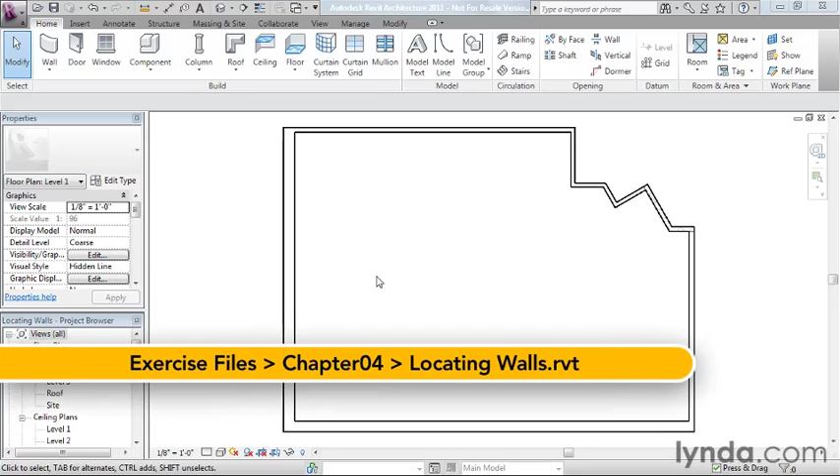So to get started, I have a really simple file here on screen called Locating Walls. There's also a PDF illustration in the folder that shows the completed floor plan layout that you can use as a reference for working as we're going along.

Let's start with the Wall tool on the Home tab. Now this time we want to actually choose a more specific type of wall. So for the interior partitions of this space, we're going to use a wall type called Interior 4 7/8 inch partition. We're choosing that off the Properties palette from the drop down at the top, referred to as the type selector. So just for future reference, when I refer to the type selector, that's what I'm talking about. We're going to go ahead and click Interior 4 7/8 inch partition.

We're going to leave the location line set to wall center line, and the base constraint is of course level 1 because we're working on that level. In this case, we want to make sure that the top constraint is going up to level 2, so we just want it to be a 1-story tall wall.

And then we're going to come over here in the file, and we're going to keep this fairly simple. If you move your mouse around on screen, it'll pre-highlight existing walls, and in this case it pre-highlighted the center line of the existing wall, and it will give you a little temporary dimension, so you can get it close. The size of this dining room is supposed to be about 8'1", but don't try to be super precise yet. That's really not the point of the exercise.

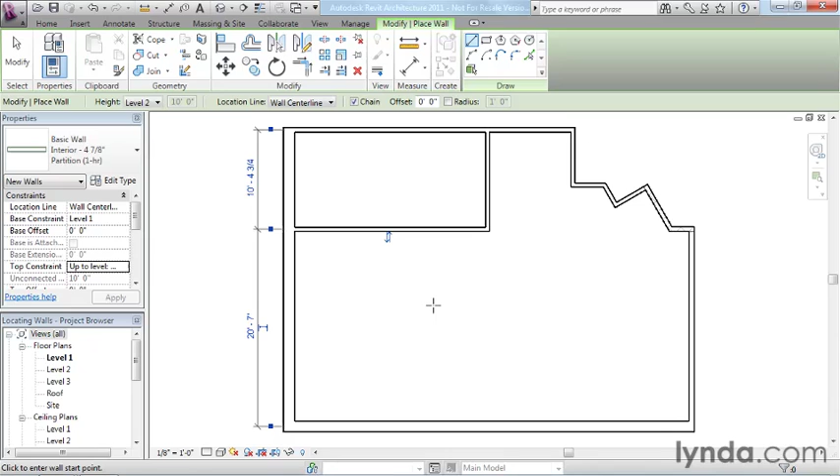What we actually want to do is just get it close, and then we just kind of eyeball our 2 locations. Now again, that may seem a little strange — eyeball, I mean, I thought we were using precision computer software here and we're supposed to be very accurate. Well, we are going to be very accurate, but we're going to do it in the Revit way.

And what I mean by that is we generally come in here and we just lay out the overall layout that we're after. You can see that I can do this fairly quickly if I'm not being overly concerned about precision, and I've just laid out this entire half of the floor plan by just doing a few simple clicks. Now I'm going to click the Modify tool or press Escape twice to reset and cancel out of the command.

And then I'm going to go in and select the walls that I've drawn, and I'm going to use the temporary dimensions to move them with accuracy. So the quote-unquote Revit way of laying out geometry is you typically lay it out generically first, and then you come back and you modify it using the temporary dimensions.

Now we saw an example of this with grids in the Grids movie, but let's go ahead and repeat it now. If you don't know the center to center distance that you want those 2 walls to be, it would be a little difficult to calculate in this case given the 7/8 of an inch, because that would make the math a little more challenging.

Really, it would be easier if we had the face-to-face dimension. Well, remember that we can click these small little grips, and each time you click it, it will toggle from face to center to face of the wall. So I can do that on both sides, and that will give me a dimension across here from this face to this face.

And I want to point something out here. If you've used any version of Revit before and you clicked away right now from the wall, it would forget that you had made that modification. But here in 2011, if I select the wall, you'll see that it remembers that I've moved those witness lines to the inside faces. So that's definitely a welcome change in this release.

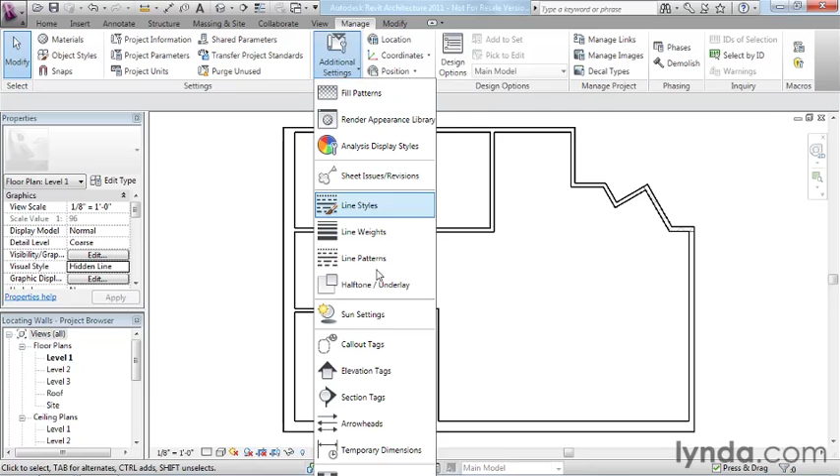Let's go over to the Manage tab, and on the Additional Settings drop-down button, we're going to go all the way down to the bottom and choose the Temporary Dimensions dialog. The Temporary Dimensions dialog will appear, and it has a variety of settings in here.

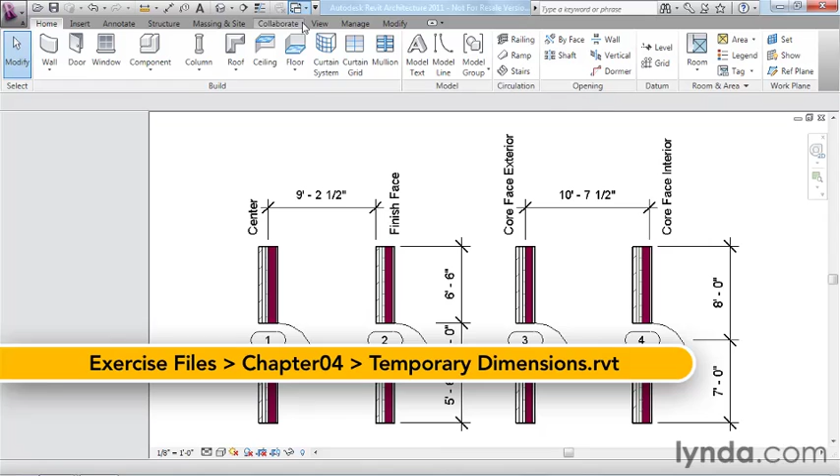To illustrate what each of these does, I have another file open in the background, so I'm going to cancel out of here temporarily. I want to show you how you can switch between open files. If you have more than one file open, this little icon on the Quick Access Toolbar will be available, and if you click on it, it will show you the other open documents you have on screen. I have another one called Temporary Dimensions, in the Chapter 4 exercise files.

Here's an illustration that shows all of the options available in Temporary Dimensions. We can either set it to its default, on the left, where it goes to the centers of the walls, or we can tell it to go to the faces of the walls. We can also tell it to go to the face of the core on the interior or the face of the core on the exterior.

Now, when it comes to doors and windows, we also have a setting there. The default is this one, where it goes to the center line of the door. On this side we have my preferred option, where it actually goes to the opening of the door. I find that I more often want to click on my door and edit this value to relocate it, rather than clicking over here and knowing what it is to the center line of the door.

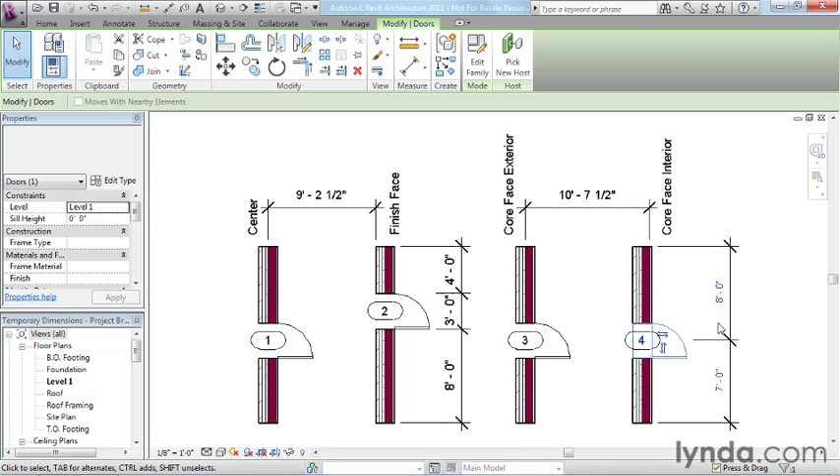So either method will work, but if you want to actually place the dimensions of the walls like we're doing in the other file, if I switch back over here, really the optimal settings for temporary dimensions ought to be this: go to the faces of the walls, and go to the openings of doors and windows. When we choose that, it's going to make it much easier for us to select walls and change the dimension to the size it ought to be.

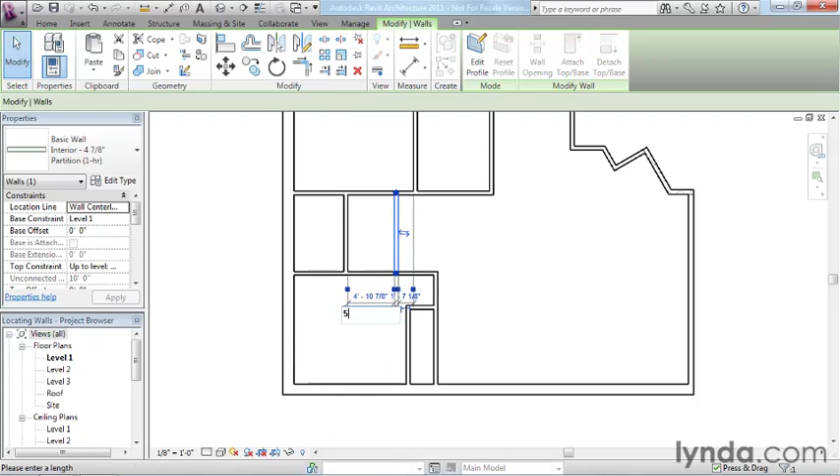So again, I can click on here, and you can see it already goes to face now. So now it's very easy for me to come in here and type in the exact size that closet ought to be. This is going to move much more quickly than what we were doing a moment ago, because I don't have to stop and edit the witness lines after each click.

So I highly recommend that you make those changes to your temporary dimension settings, and you can see how much more quickly your work will progress here.